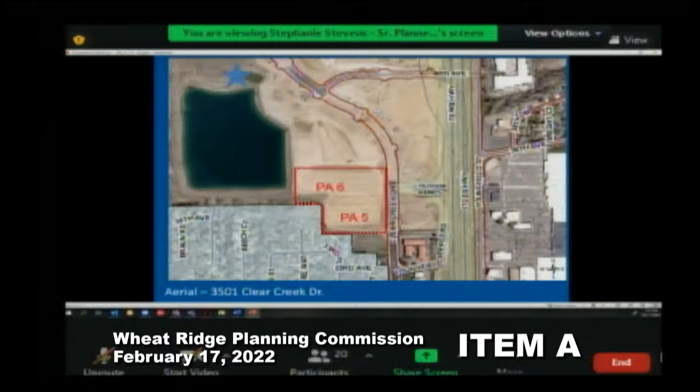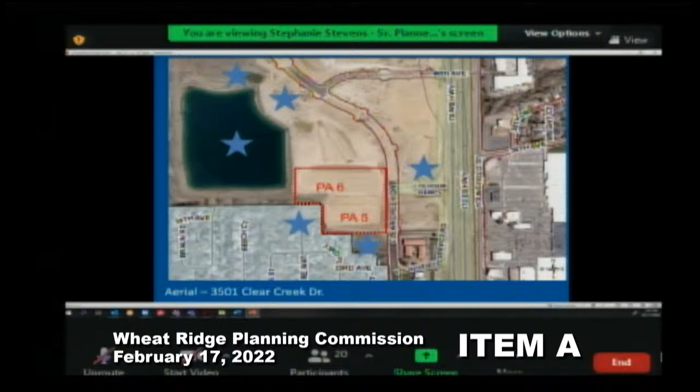Some of the land use applications we have in now: the first one is on the upper north side of the west portion of Clear Creek Drive, and that is in for an apartment, a second phase of the Outlook apartments that are on the east side. The next one we have in is Hampton Inn Hotel, moving south, that will be coming before you all. And then Jefferson County Residential is located southwest of the site, Coors Pond to the west, I-70 hook ramp to the east, and the 70 West Business Center planned commercial development is located south of the site and also vacant.

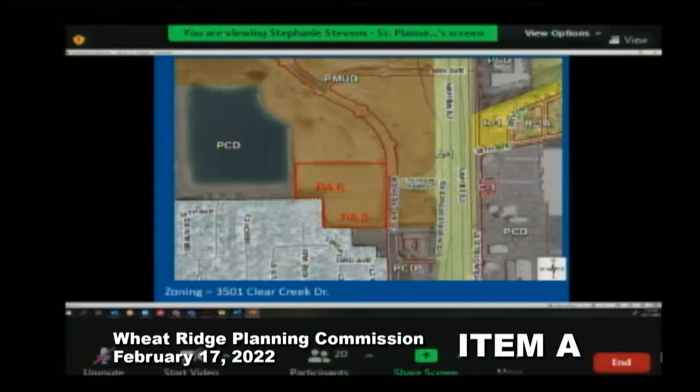Planning areas 5 and 6 of Clear Creek Crossing are designated as the Harvest District, denoting this area as a commercial sub-district of the development. It's surrounded by mixed use and commercial planned development zoning to the north, west, and south, and to the southwest is the Jefferson County Residential.

The request for SDP approval is the second step in a two-part approval process pertaining to plan development. The first step occurred in 2018 when Planning Commission and Council approved the Clear Creek Crossing Planned Mixed Use Outline Development Plan, which established the zoning. The zone change also included approval of a vision book and design pattern book, which establishes more architectural themes.

The design pattern book also includes the more substantive development regulations, and an architectural control committee was established by this zoning. It's for the Clear Creek Crossing development, comprised of members of both city staff and the master developer, to ensure consistency across the projects and third-party review. The ACC has provided their recommendation of approval.

The applicant is requesting to build an approximately 111,000 square foot building and 41,400 square foot amenity deck on 12.2 acres. The primary use is classified as indoor and outdoor recreation, which is permitted in these planning areas. In the ODP, these planning areas were divided into distinct planning areas, primarily because of grade challenges and required shared access to the parcel to the south.

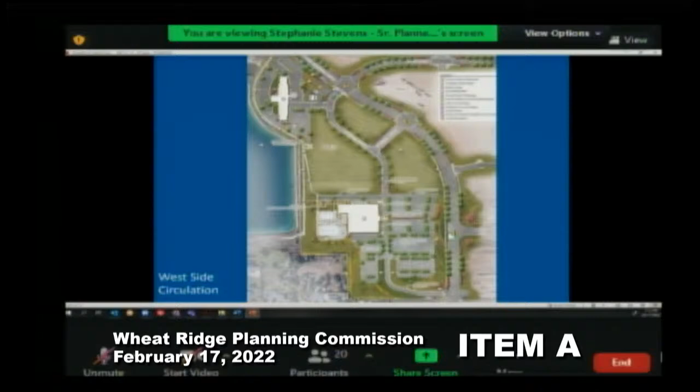The SDP shows the building and amenity deck situated on the west side of the site, with parking located adjacent to Clear Creek Drive and surface lots. Vehicular and pedestrian connections are provided throughout the site, shown in red and yellow respectively. There are 525 total parking spaces proposed, broken up into smaller lots by way of internal street-like drives and screened from Clear Creek Drive by grading and landscaping.

The grade on the site drops 10 to 20 feet below Clear Creek Drive. A 20-foot setback is required along the southwest portion of the site adjacent to the residential, shown in orange on the screen. Setback requirements are imposed by the design pattern book, and the lifetime building complies with those standards.

The SDP also complies with all grading, utilities, drainage, and traffic plans. Multiple site constraints were balanced, including 55 feet of elevation change across the site, a regional stormwater bypass system, a future regional trail corridor, and the relocation of the Applewood sanitary sewer interceptor. The site was ultimately laid out to balance earthwork while maintaining manageable slopes throughout the perimeter of the site.

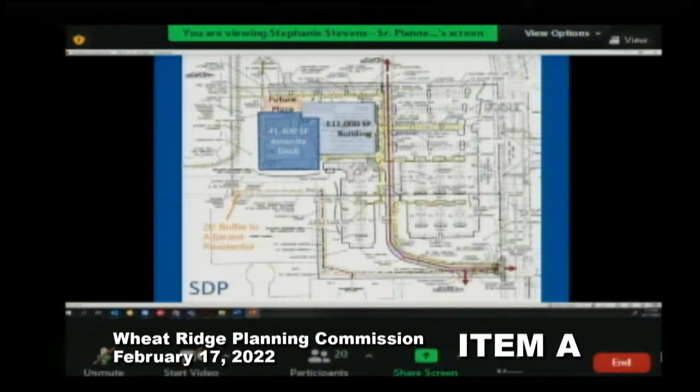Rather than constructing large retaining walls, the site plan takes advantage of the topography by incorporating large rolling landscape buffers. To ensure that the rolling hill effect is achieved, staff has provided a recommended condition of approval to require periodic inspections of grading.

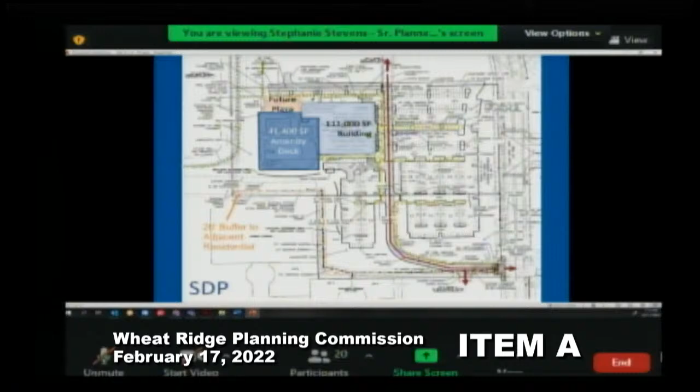The project far exceeds the minimum requirements for the 20% of the gross lot size to be landscaped by utilizing parking lot landscape islands, as well as frontages and buffers for trees, shrubs, ornamental grasses, and perennials. The site plan is over 40% landscaped, largely comprised of bands of drought-tolerant native seed and landscape screening at the perimeter of the site, with more formal planting beds framing the building foundation and site amenities.

Utility corridors prevented some tree plantings within landscape islands, but have been relocated elsewhere on site. Small retaining walls were added along the southwest of the site to avoid steep slopes. The area with the rolling hill effect will be primarily landscaped with native plantings.

A public plaza and trail connection are proposed along the west side, northwest side of the site, to be constructed by the master developer under separate permits.

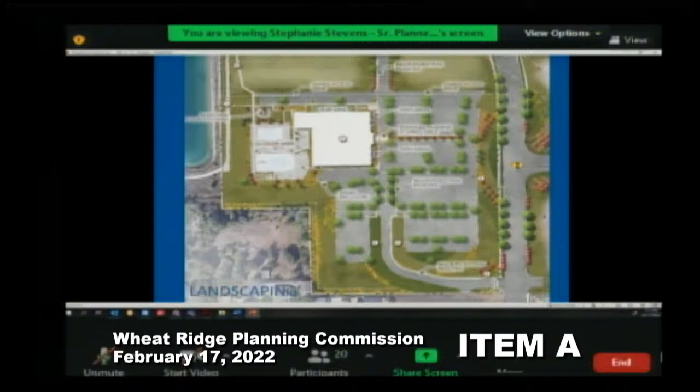The architectural style is driven by the Clear Creek Crossing Design Pattern Book and Vision Book, which call for a modern agrarian aesthetic that blends traditional agrarian forms and materials with a modern feel. It requires strong attention to be paid to the pedestrian realm.

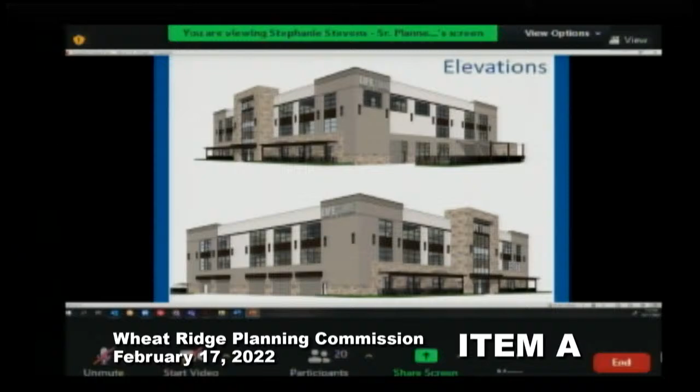The building is proposed to be approximately 60 feet tall, and the architecture is comprised primarily of brick, stone, metal panel, and glass. The materials carry over to the north, west, and south elevations, resulting in four-sided architecture. The building form considers both the pedestrian realm and distant views, with trellis elements along the main entry and projecting elements utilizing varied materials at main focal points.

The building is accentuated using corner elements, enhanced entries, changes to material, and architectural expression. Overall facade transparency on the street-facing facade meets requirements of the design pattern book. This architecture has evolved throughout the review based on staff feedback, and materials provided in the packet show how the detailed standards are being met.

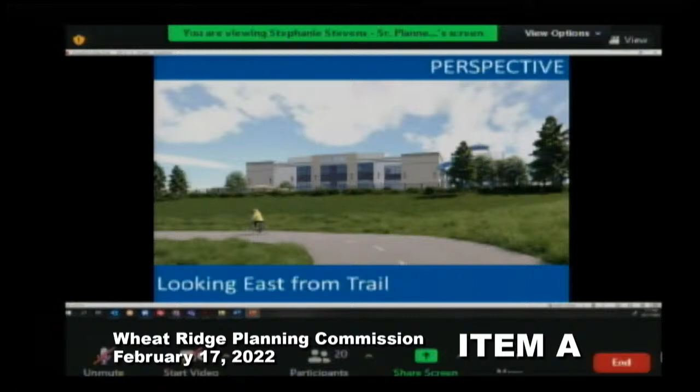Since Wheat Ridge is not a full service city, we sent the application on referral to fire, sanitation, and water districts, as well as completed our internal review. We did not receive objections from outside agencies, and coordination with these districts is ongoing.

Civil construction documents are nearing approval, and the plat is currently under review. A recommended condition of approval has been placed to ensure that the SDP matches the plat.

Before the hearing, the property was posted for 15 days, and letters were sent to property owners and residences within a 600-foot radius. The project was also posted to Wheat Ridge Speaks.

One comment was received on Wheat Ridge Speaks pertaining to the building location and lack of orientation to the street. The ODP and development standards for this particular location in Clear Creek Crossing do not require orientation to the street, presumably due to challenging grades and site constraints.

Staff finds that the SDP is consistent with the ODP and is in compliance with all standards set forth in the ODP Design Pattern Book and City Code. The SDP is consistent with the purpose of a planned development, and all agencies can serve the property. Ultimately, staff is recommending approval with conditions as listed in the staff report.

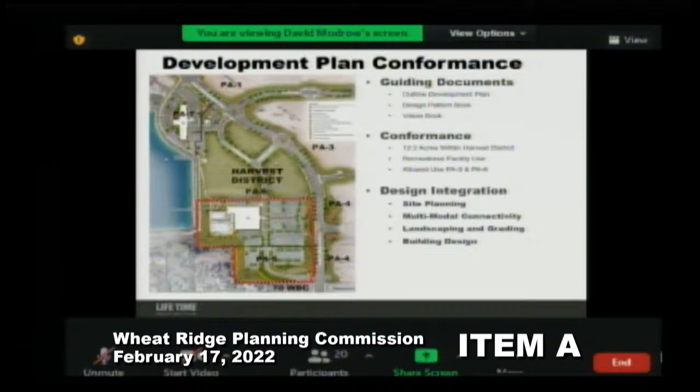The Clear Creek Crossing Outline Development Plan, Design Pattern Book, and Vision Book have shaped our specific development plan application. The proposed lifetime use of a commercial recreational facility is an allowed use in planning areas 5 and 6 of the Harvest District. For this presentation, I'll focus on the 4 foundations of design integration that shaped our application: site planning, multimodal connectivity, landscaping and grading, and building design.

Through multiple iterations of prototypes and varying orientations, the proposed site was designed to meet the requirements and intent of the guiding documents. During the planning stages, specific priorities were made to provide a sense of arrival from the I-70 freeway, to preserve the spectacular view corridors of the mountainous skyline, to embrace the existing topography of the site, and provide robust landscape buffers to transition from the residential uses to the south and southwest.

The resulting lifetime site plan orients its front door to the east and its outdoor amenities to the west. This orientation engages the 3-story, 60-foot tall building with the community as it sits prominently just west of the I-70 ramp intersection with Clear Creek Drive. This orientation provides a spectacular sense of arrival to the Clear Creek Crossing development.

With the front door oriented east, the outdoor amenity deck takes advantage of the scenic mountain skyline and the majestic Coors holding pond to the west.

Rather than constructing large obtrusive retaining walls to address the significant grade change, the site plan embraces the topography of the site and incorporates large rolling landscape buffers from our neighbors to the south and west. The resulting site plan is over 40% landscape, and that's doubling the 20% requirement.

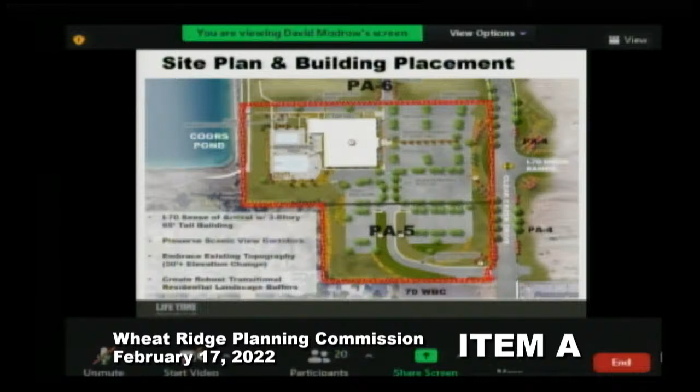This site rendering was created to capture the view shed as you exit the I-70 hook ramps onto Clear Creek Drive. The Lifetime Anchor building provides an unmistakable sense of arrival to the Clear Creek Crossing development.

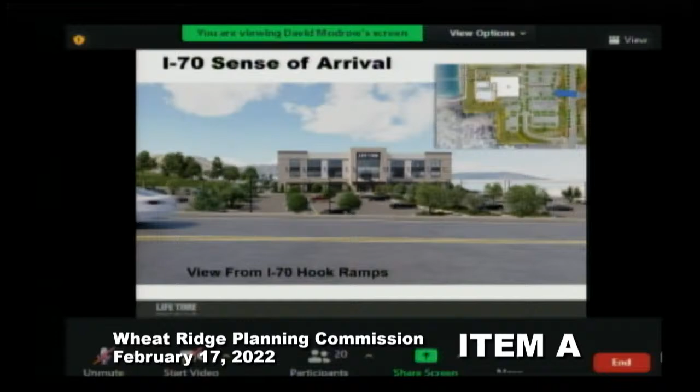Consistent with the guiding documents, there are 2 primary vehicular access points to the site. Access from the north is provided by a shared private driveway network fed by 2 signalized intersections along Clear Creek Drive to the north. The proposed internal street will extend through the Lifetime site to the south before heading back east to intersect with Clear Creek Drive at the second access point. This internal street network provides a strong continuous connection of planning areas 5, 6, and 7 that were not seen in previous Harvest District site plan iterations.

The Southern Access Drive has been designed to provide safe and convenient access to the Clear Creek Crossing development, as well as the undeveloped 70 West Business Center outparcel to the south. Lifetime has collaborated with the 70 West Business Center representatives to coordinate the best point of access that balances traffic concerns, as well as the change of elevation between the 2 properties. An access and utility easement will be provided by a plat to memorialize that agreement.

As part of the SDP application, a trip generation conformance study was completed on behalf of Lifetime and the master developer. Lifetime, along with several other proposed uses within PA6, represent significant departures from prior assumptions that were evaluated in the outdated Clear Creek Crossing Master TIS. The most impactful trip generation change to the study was the elimination of a discount superstore and gas station. As a result of these updates, trip generation was reduced by approximately 47%. The study further indicated that the proposed Lifetime traffic can be accommodated with access as proposed.

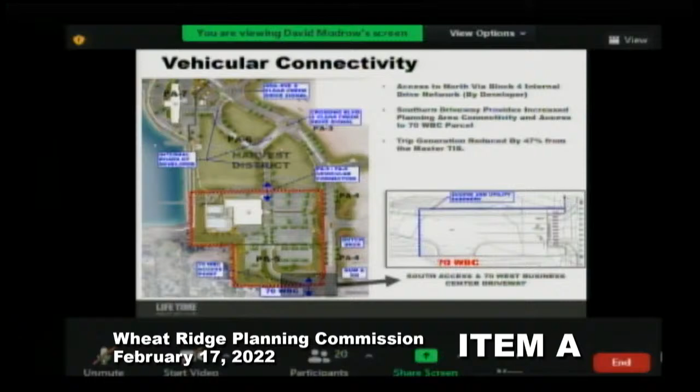Lifetime has developed a plan to provide strong pedestrian and bike connections throughout the site and to the surrounding infrastructure. Consistent with the guiding documents, access has been provided to Clear Creek Drive to the south, adjacent to the southern access drive. Access to the north is provided by the Block 4 internal road corridor through PA6 and connects with the larger pedestrian network located at the 40th Avenue intersection.

A trailhead plaza with a direct stair connection to the future regional trail will be constructed at the northwest corner of the Lifetime site. Details for the trailhead plaza will be coordinated with the master developer as the trail plans progress. Additionally, an accessible at-grade sidewalk connection will extend north of the site for future connection to the trail through the remainder of PA6. This connection will be constructed by the master developer as the remainder of PA6 develops.

Internally, the site has been designed for safe travel of bicyclists, pedestrians, and vehicles with designated areas to minimize conflicts. Internal sidewalk networks were designed to funnel pedestrians to defined crossings of the main driveway. Where pedestrian ways cross vehicular driveways, a combination of differentiated pavements and painted crosswalks will be used to alert drivers and to calm traffic. A zero curb pedestrian level crossing is proposed at the main entrance to allow for safe, accessible access to the parking lot and to the site pedestrian network.

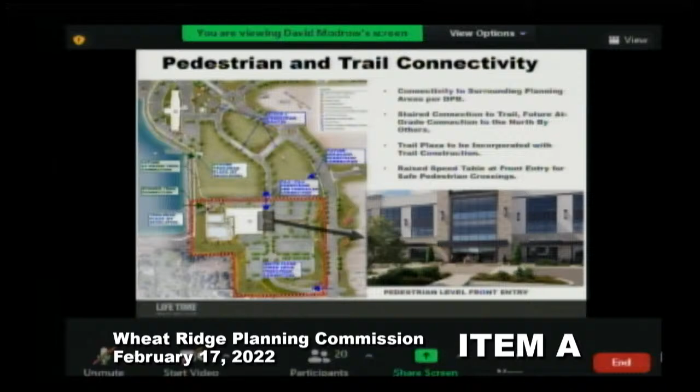The site perimeter and parking lot landscape design centers around large alternating bands of drought-tolerant native grasses, native prairies, and landscape screening beds at the perimeter of the site to complement the design theme of the guiding documents. In addition to the required 20-foot landscape screening buffer for the residential boundary to the south, large rolling hillsides were incorporated into the site, providing over 40% of landscape space. These large landscape buffers were purposely located to enhance the transition from the residential uses to the south.

In contrast, landscapes surrounding the building and within the outdoor amenity deck feature formal planting beds, boulder outcroppings, and site furnishings aimed at grounding the building and complementing the site's agrarian architectural theme.

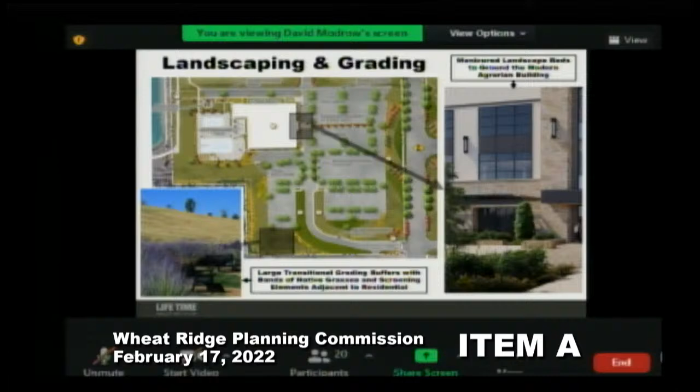Through thoughtful collaboration with city staff, the master developer, and the architectural control committee, our building design has evolved tremendously over the course of the application. We heard consistent feedback that while impressive, the contemporary porcelain-clad facade of our flagship J3 prototype was not a direct fit for the modern agrarian styling of the development. Lifetime completely redesigned the material shell of the building and eliminated the contemporary porcelain cladding that dominated the initial elevations.

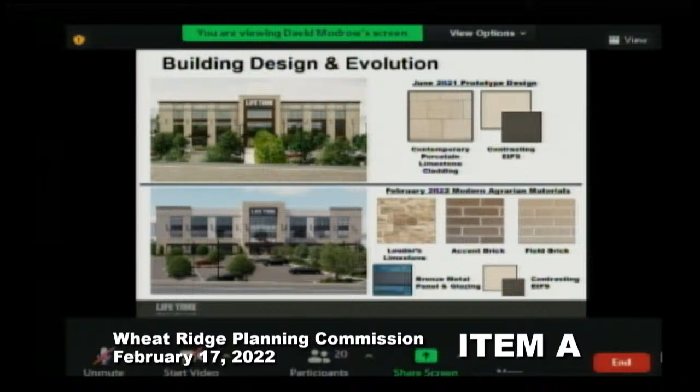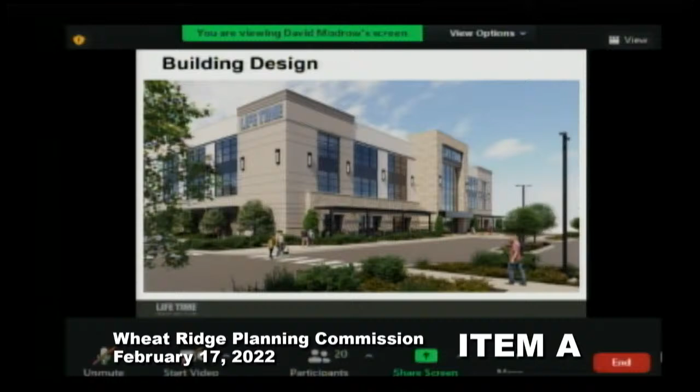In its place, Lifetime introduced a palette of natural limestone, field brick with earth tone accent courses, bronze metal paneling, glazing, and contrasting EIFS. The end result of this redesigned effort is a building we are extremely proud of and undoubtedly represents the Lifetime brand and the design theme of the Clear Creek Crossing development. The timeless quality materials chosen are the perfect blend of modern agrarian architecture and Lifetime's luxury brand.

Careful consideration was made to emphasize large-scale identifying stone elements on the public-facing east and west elevations. A variety of color and texture is used, with more tactile materials near the structure base and corners to give the building a sense of venerability when close up. Higher on the building, elements become more pronounced for visibility from a greater distance. Lifetime is truly thrilled with the final product and its cohesiveness with the surrounding development.

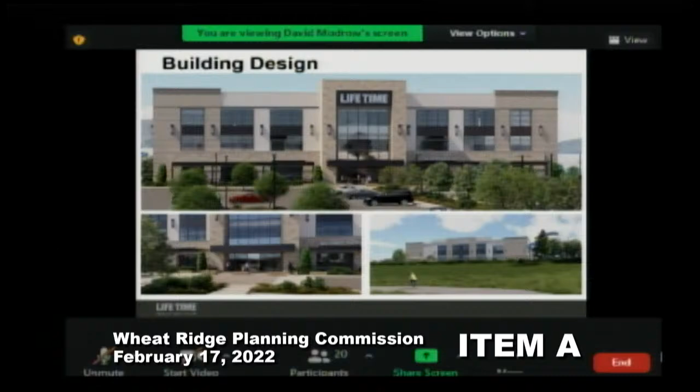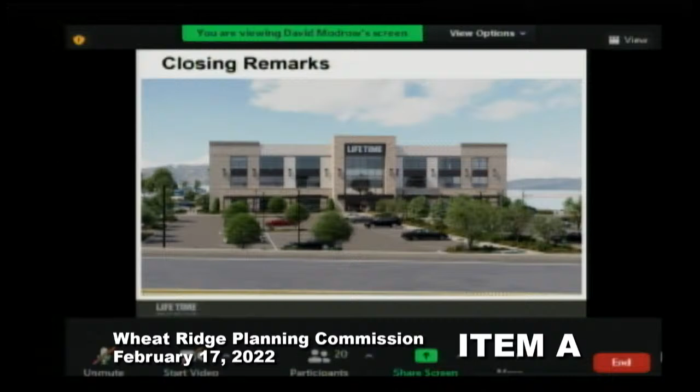The entire Lifetime property development team and I would like to thank the tireless city staff, Architectural Control Committee, Evergreen Development Company, and the neighborhood for providing thoughtful and meaningful input throughout the application process. To the members of the Planning Commission, we are extremely grateful to have our application heard, and we are happy to answer any questions or concerns you may have about the application materials for the Lifetime brand.

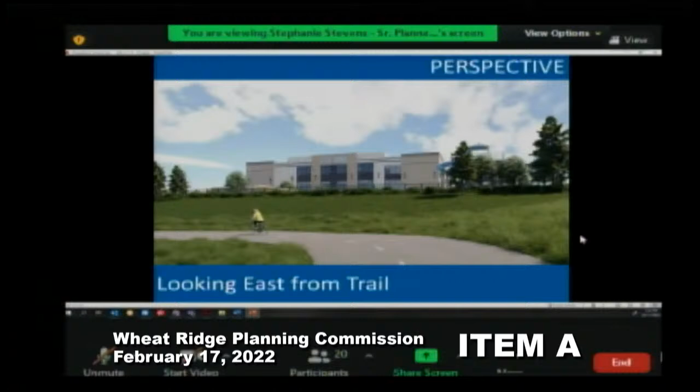Yeah, I mean, I kind of guessed that. I guess I'm curious again, what's the feet and the percent grade? Okay, so you could see the top of, I would assume that's like an umbrella or pergola is what I see on the left. Yep, to the left are cabanas or lounge seating for the pool, and then to the right you see the water slide.

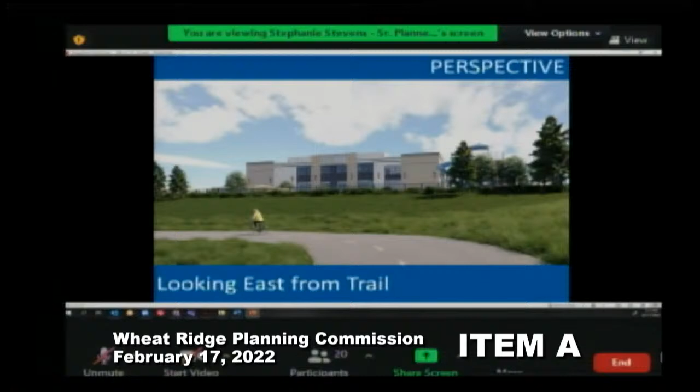And what's unique here is we're sitting about 20 or 15 feet below the amenity deck at the trail, but the residents to the east are another - I think there's 55 feet across of grade change across the site, so they sit 25 to 30 feet above the amenity deck as well. So they have a perspective view that looks significantly down on the building.

Okay, and just to clarify, I know 20% is required - you're doing landscaping instead of a retaining wall, is that correct? That's correct. We have introduced 2 to 3 foot single outcropping boulder walls to break up the slope in a handful of areas where we couldn't quite get to a 4-to-1 grade percentage. So in those areas, to break up the landscape and slope, we added some small single course retaining walls, primarily on the southwestern side of the site, near the parking lot and the south side of the pool deck.

And is there any way for the neighbors to access the site? Just thinking of connectivity - instead of neighbors having to go all the way around to access the site, if they wanted to walk from their neighborhood to Lifetime Fitness, is there any kind of pedestrian connection that way? Yeah, excuse me, let me share my screen real quickly, if that's okay, and I just have to clear out of the PowerPoint. Okay, yeah, sometimes the plans are hard to navigate with the size.

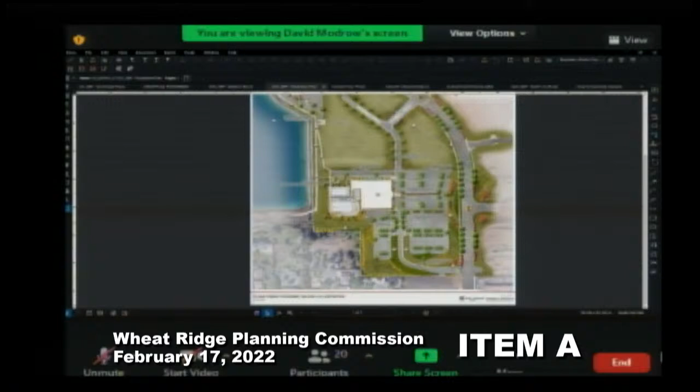What that did is allowed us, without having large retaining walls, some natural separation. The pool deck is also set into the grades. Let me pull up the SDP set with the grading that shows that depth - these are our 2-foot contours. Our closest neighbor here in Roxbury Gardens sits well above the pool deck, you can see significant grade change. I think these are 1-foot contours on the neighbor's property - there's about 20 feet of fall through their property, and another 12 or so feet at this point to the pool deck. So there's a significant distance from them.

The other feedback we heard was proximity of this driveway to the residential neighborhood. There used to be a more serpentine approach to the site that traversed the site, and what we did is pull that back so it aligns more with the 70 West Business Center property line and comes to the front of the building. So it really eliminated the frontage of that driveway from that development.

Okay, great, thank you. I know we're not supposed to do comments yet, but I do think the grade changes will help buffer some of that noise as well as the site improvements. So thank you for going over that. Thank you, Commissioner Antle, and we will go to Commissioner Kearns.

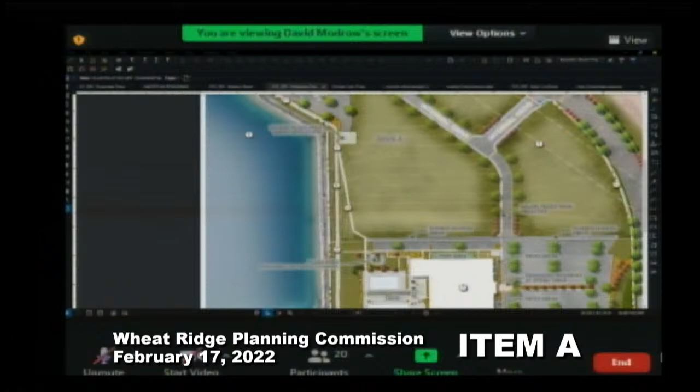So you have two points of access, one that traverses directly up at the Lifetime site, and then the ADA access that goes along the corridor of the trail. Okay, so it looks like all of your sidewalks and trail connections on this property are capable of being plowed by a vehicle, except for that stairway.

Except for that stairway, which will have to be shoveled by hand and will probably get icy in the winter and could be dangerous if you're really looking at the scheme of things. So are you prepared to take on that maintenance of that stairway and that liability of risk?

What's helpful is that the plaza area is going to be front and center of that area as well, so it's not a piece of infrastructure that I anticipate will get forgotten as the trail is plowed. Because it will be, I anticipate, we're excited about it, that use is high visibility and main access for our members coming from those different pedestrian locations.

Does the stairway have a handrail? So the stairway isn't at final design because of the plaza design, and the final grading of the trail isn't complete yet. So we plan to incorporate that, though it's not necessarily going to be in this exact orientation or location, because we want it to have that engaged with the plaza as well.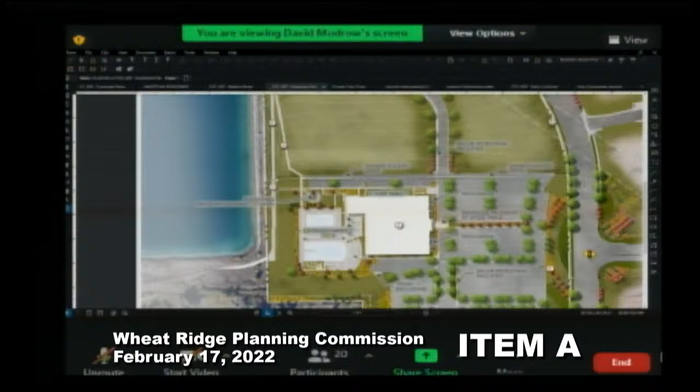The parking lot seems really, really large. I did a quick count, I counted 500 spaces plus about 11 ADA spaces. Is that just a design choice, does Lifetime dictate how large the parking lot needs to be, or does the city of Wheat Ridge dictate how large the parking lot needs to be?

Yeah, so both. It's a function of a parking analysis that we did that's driven by code, and then based on our programming as well. We're right in line with what Lifetime is comfortable with based on multiple parking studies and similar buildings. This will be our 8th club in the Denver market, so we look at similar club sizes for parking demand. It's based on membership projections, and we do meet city requirements as well.

It just, when I look at this, it looks like one of those mall parking lots that operates at around 25 to 30% capacity most of the year, except for about one week a year where it operates at about 65% capacity, but it's always overbuilt.

And to me, the lots on the south side of the property seem unnecessary. These are the lots by numbers 2 and 3. I don't think you need those. Now look, I'm no expert, this is just my looking at it. I haven't done any calculations, but it seems like those southern lots are just taking up extra space that could be developable property otherwise. It doesn't seem like anybody's going to park down there and walk all the way to the building. I mean, maybe on the week after New Year's, but yeah.

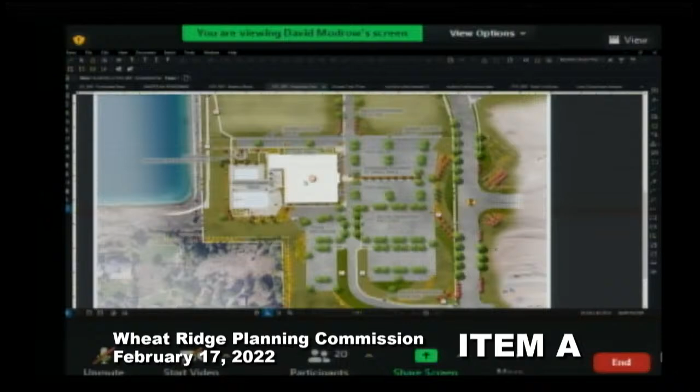We do also have amenities that are open to the public, like the spa, where you have hair, nails, skin treatments, massage. Those are all open to the public. You check in at the front desk, but you can visit the spa. And then same with the Life Cafe and the Life Cafe bar and coffee bar. All those amenities are open to the public, and those are at the front of the building. It's all on the first floor, the cafe, the coffee bar, and the spa are on that first level. So they're activated at that pedestrian level as public amenities as well.

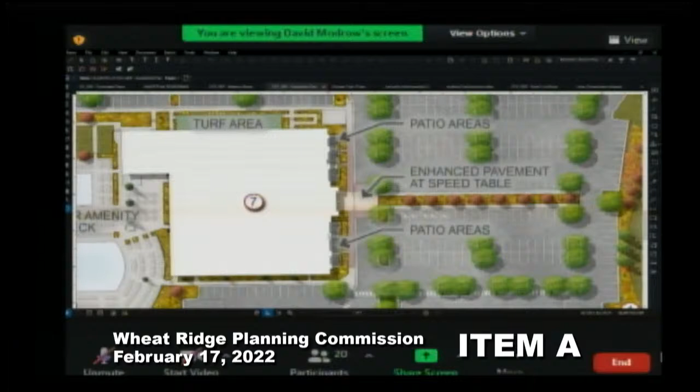Okay, also, have you done a study of potential people in the area? What radius have you studied in order to know that this will be something available to a large part of the population?

Yeah, absolutely. We have a relatively robust property intelligence team that looks at drive times, demographics. I sat through a strategy meeting just this afternoon, and I'm wowed by the analytics we're able to look at. So each one of our sites, there's great attention to detail to the demographics, drive times, and access. As I was alluding to earlier, of our over 150 prototype clubs, we haven't had to close one in 25 years. So we're very particular about our site selection, and extremely excited about this particular site and demographic.

Yeah, well, I guess what I'm thinking, when you talk about New York City and things like that, you have a much denser population. So how far do you think you would pull people to come to this site? 5 miles, 10 miles, 20 miles? How far do you think they would travel to come here? So we look at drive times, and it's typically in that 10 to 15 minute drive time window.

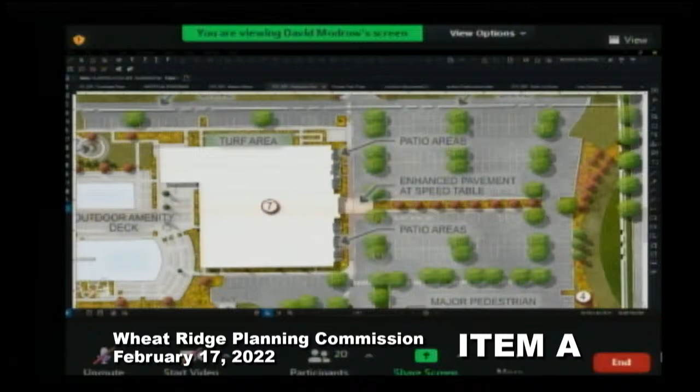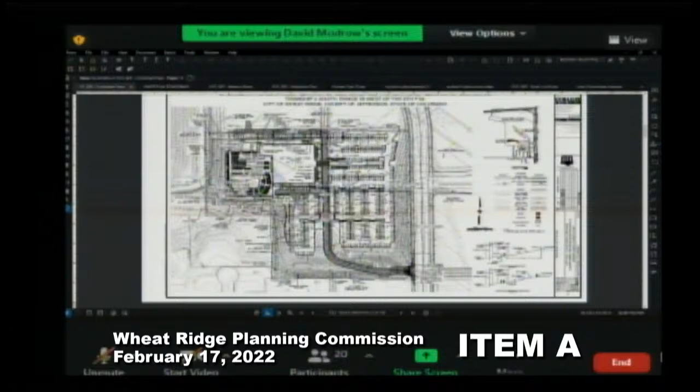Thank you, Mr. Modrow. Following up on the earlier discussion of contours and grading, if you wouldn't mind pulling that contour map up again - I'm trying my best to get a better understanding, but if I read this correctly, the general contour of the area flows from south to north, so the residential area to the southwest is higher up, but you've created a flat area with contours around the side in the parking lots and the building itself. Am I reading that correctly?

Yeah, so all of PA6 kind of sits in a bowl. The residential sits well above, and 70WC well above our site, so everything falls south to north. These two parking fields south of the building have manageable grades of 4 to 5%, and then the area right outside the building flattens out, and then you fall into Coors Pond. From Clear Creek Drive and our boundary to the south and southwest, the site sits in a bowl, so it funnels to our site.

And then you see this driveway traverses that slope, and you have this grand entry feel with landscape buffers where the driveway sits above the parking lots. But then the building sits about 15 to 20 feet below the hook ramps, and then falls another 15 to 20 feet toward Coors Pond.

You had a view looking west from the hook ramp, and it appeared that the entire area - all the parking lots, the building - are below the grade of Clear Creek Drive and the hook ramp exit. Is that correct? That's right. And when you enter from the South Drive and come through that entrance, and head north along the internal drive, does that road have a grade on it, or is it flat?

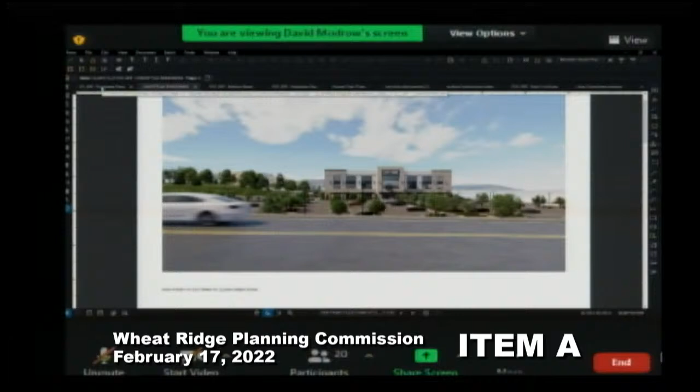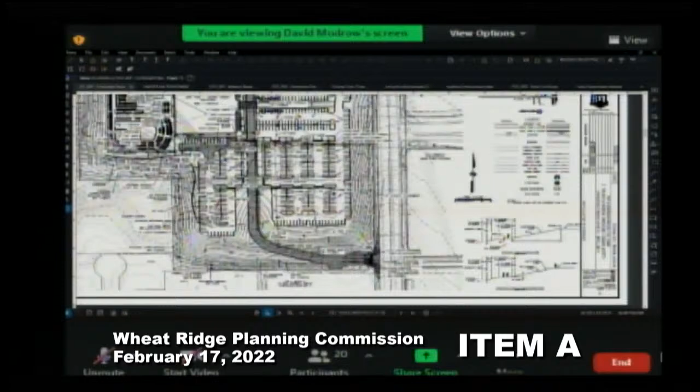That is where we make up all the grade difference. So Clear Creek Drive, as you are heading north, falls significantly from 70 WBC. You can see the grade contours. It falls at about probably around 5, I can't recall if these are 1 or 2 foot contours, but it falls from south to north. And our drive aisle also mimics that, but takes on that additional 10 to 15 feet. It's level at the access to 70 WBC, and then you fall at about an 8% grade into the site to our front door. So it flattens out in the area at the lower parking lots.

Is there any concern about snow and ice on that grade? So 8% is kind of a design standard. You want to keep drives below 8%. So we went through multiple iterations of trying to switch this back and do different layouts. This is the best combination of landscape buffers and grading balance for the site. So the answer is no, well, you will want to keep it clean and plowed, but 8% is one of those civil engineering design guidelines you want to stay within. And then parking lots, you want to stay under 5%. These are all at about 4.5% to 5% on these upper parking lots.

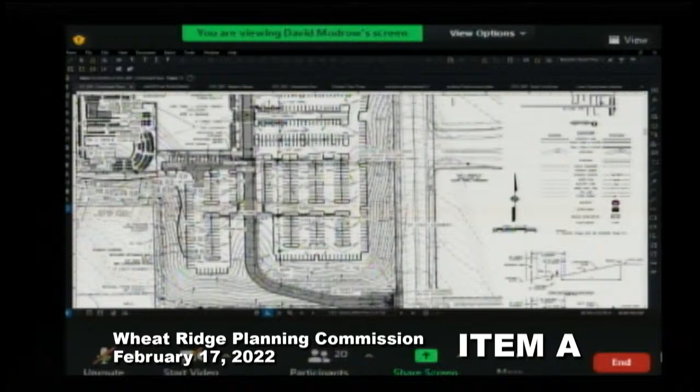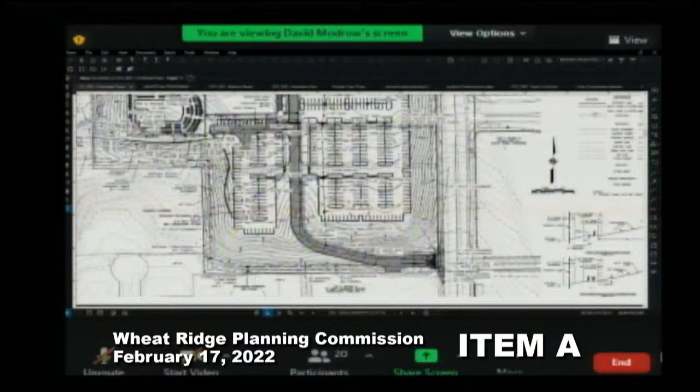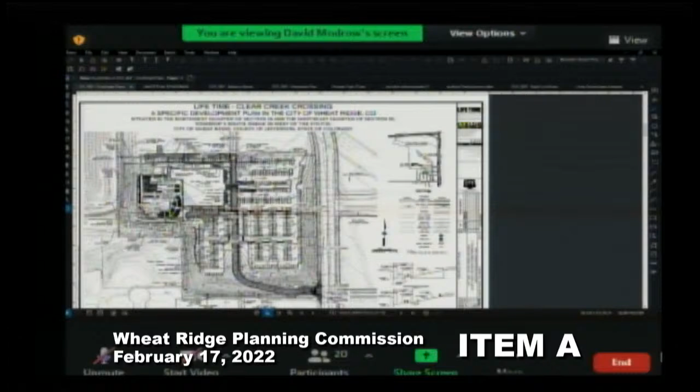Okay, and then just one more question about the parking lots. The stormwater runoff goes which direction, and how is it collected? Yeah, so there's two main stormwater collection points. There's a stormwater bypass system that really takes a lot of the Jefferson County runoff from the south. And so there's a storm sewer diversion system and a swale that carries runoff from our south around Coors Pond. There's an interceptor ditch that's been built by the master developer. So that takes offsite runoff to the south. And then our stormwater is collected via internal storm drains, and the main drive, that's a utility corridor that'll be built by the developer, brings in a trunk storm sewer line, and all of the stormwater management is done on the northeast side of Clear Creek Crossing.

Great, and so is there any concern that eventually when the rest of PA6 is developed that there won't be sufficient capacity? No, and a big part of that is we've added, we have 40% landscape space really due to these large landscape buffers. So we're putting together our stormwater management compliance letter that works with the overall drainage pattern. But since there were pretty high intense uses in the initial stormwater study, we show a lot more pervious area that has less intense runoff implications. But that's all put together with the master drainage plan too, and that'll be evaluated with our construction documents.